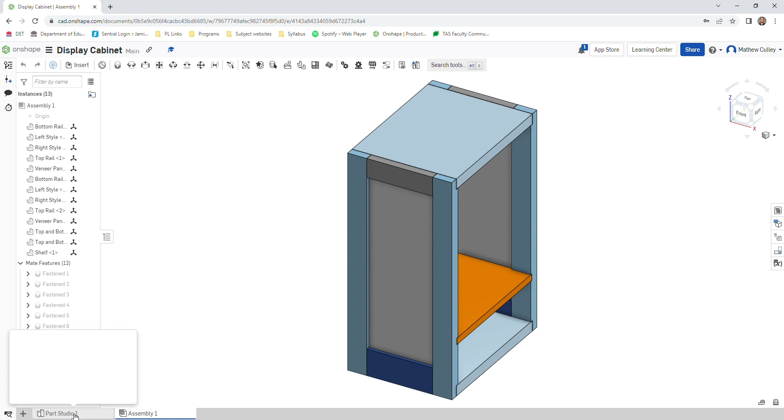The next component we're going to draw and construct is the drawer for our display cabinet. So we're going to go back into our part studio here down the bottom. Left click, double click on front on my cube here. Okay, and we're going to begin a new sketch.

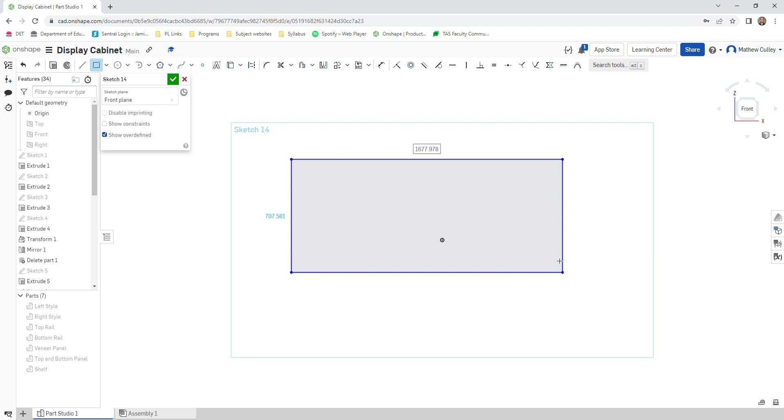Now we'll start with the drawer front. I need to select my sketch plane front. I'm going to start out with a corner rectangle, G, that is 228 millimeters by 72 millimeters. Press escape, and just delete those dimensions to tidy it up.

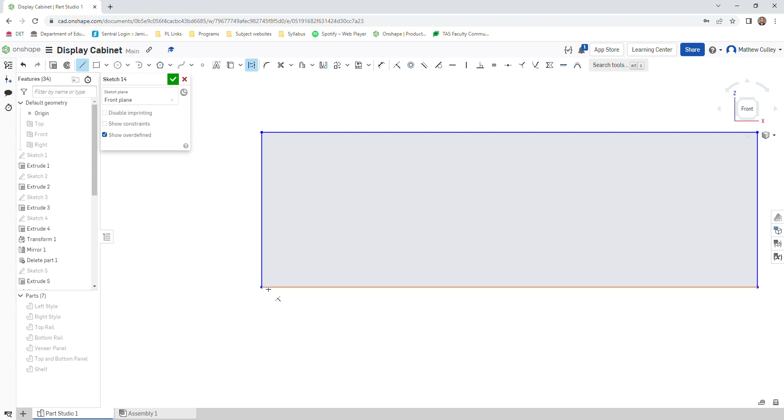L for line, Q for construction. Just going to click on this bottom corner here. We're going to come across 12 millimeters. Enter. Escape. And I'll do the same thing from the other side.

So L for line, Q for construction. Left click. Drag across 12. Enter. Now from that point you can go straight up to the top, left click, and enter.

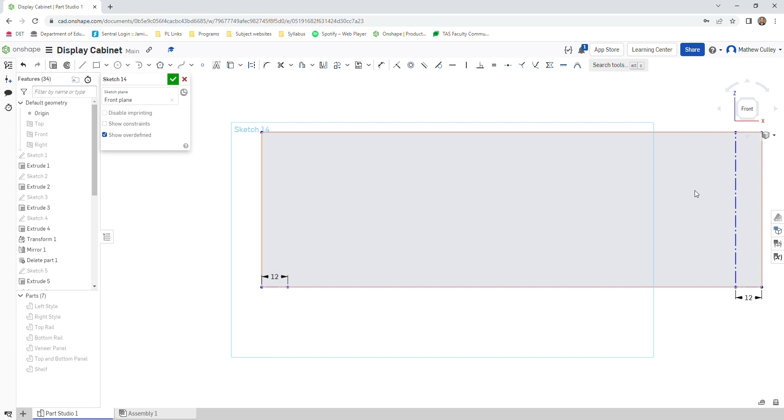Escape. Now if ever you want to get any of your dimensions back, say for this line here or that line there, all you need to do is go up to our dimension tool, left click once, click on our line, drag down. Now you can see that by putting in those construction lines, it has changed my overall dimension, my original size, which was 228. So I'm just going to change that back. Okay, and it pulls it back into the size that it needs to be.

Press escape. Okay, I'm going to go line and Q for construction again. Start at this bottom corner, come up 8 millimeters, enter. And I'll do the same thing over here. Now I can either come back over and restart it from the bottom, or I can just bring my construction line right across. You can see how it's gone yellow, and I snap it in on the side here, left click and escape. I now have my construction line set to begin drawing my finger joints for the front of the drawer.

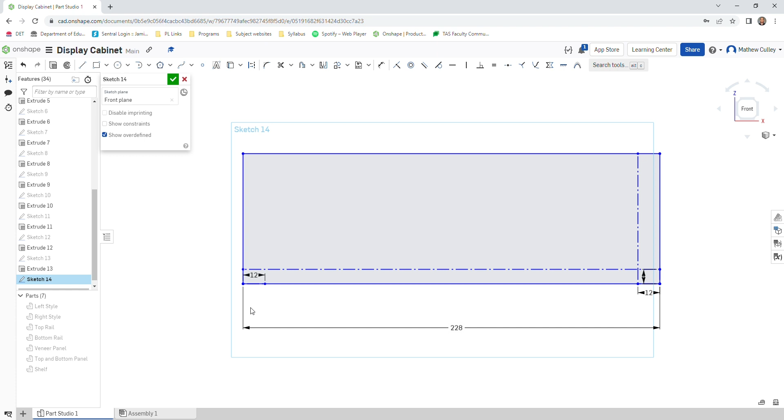I'm just going to put in one more construction line. L, Q, come up to the top, making sure that it is 90 degrees. Done. Okay, this next part is a little bit tricky, but follow along so we can make sure that your finger joints are all evenly spaced apart.

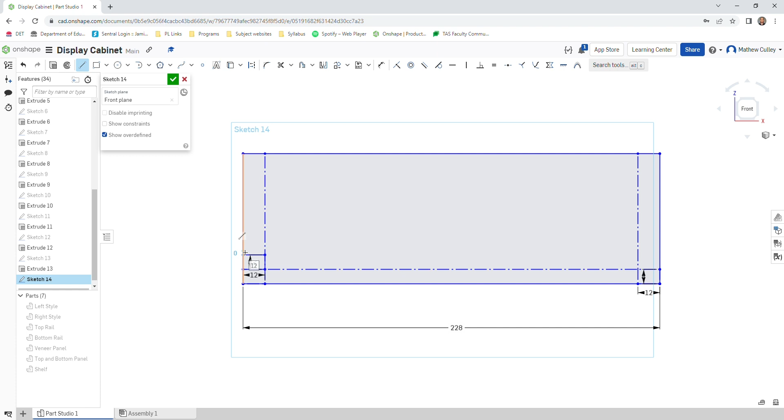So we're going to start with L for line. Just going to start on this construction point, left click once, come across to where it intersects that construction line, left click, that should be 12 millimeters, that's fine. Going to come up, left click once, make that one 8, hit enter. Now come back across to the side here. We're going to continue that process and snake our way all the way up the side here. So 8, enter, then come up, 8, enter.

Making sure that all my lines are perpendicular at 90 degrees. That is my last one, so escape.

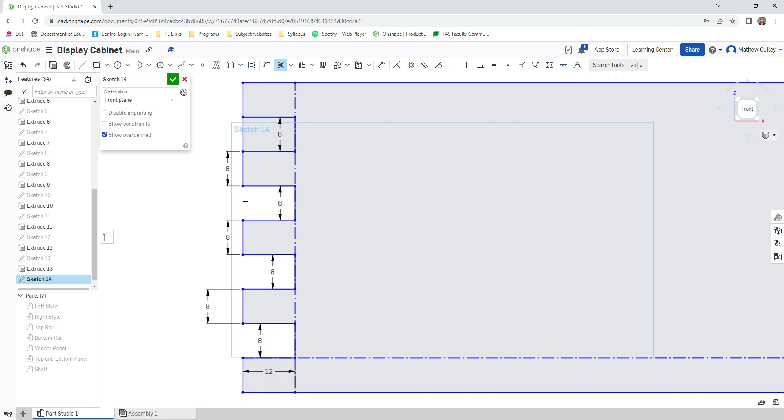Okay, you're now going to grab your trim tool. So we can come along up the top here to our scissors, or we can press M for our shortcut. We're going to start trimming some of these lines that we don't need here. So we're going to remove that one there, there, and there. And you can see we're starting to make our finger joint.

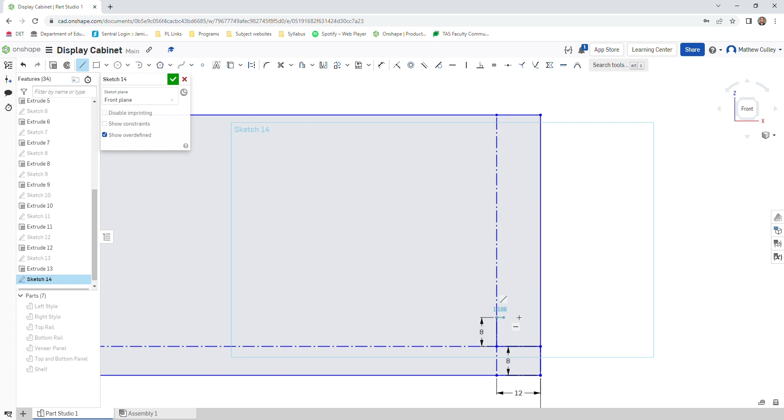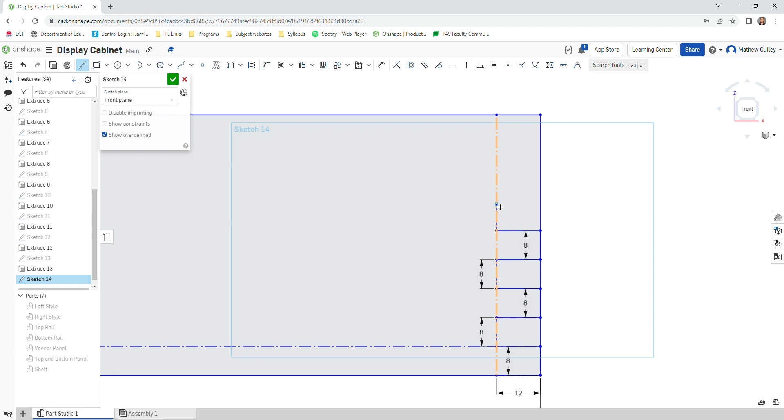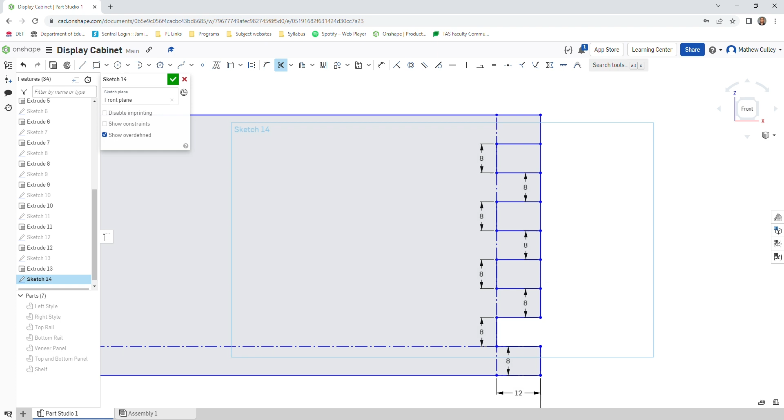We're going to repeat this process on this side here to complete the other side. Left click, 12, up 8, and continue that all the way up, snaking your way to the top. And escape. M for trim. Start with the second line and delete every second section. And we now have our fingers on either end.

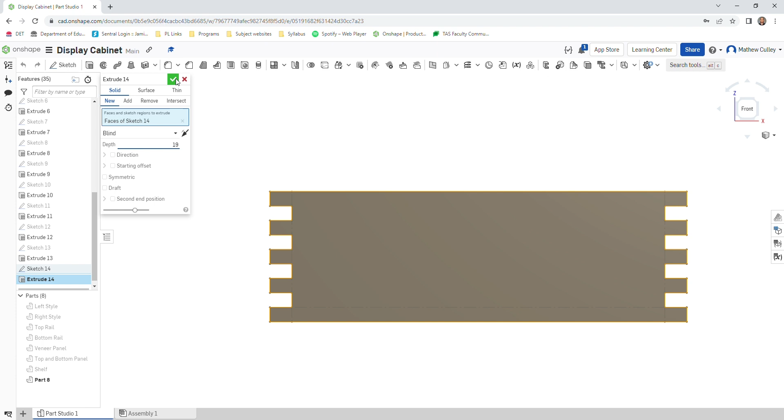I'm now going to go to my extrude tool. Okay, and we're going to extrude that 19 millimeters. Okay, that is now our drawer front with our finger joints.

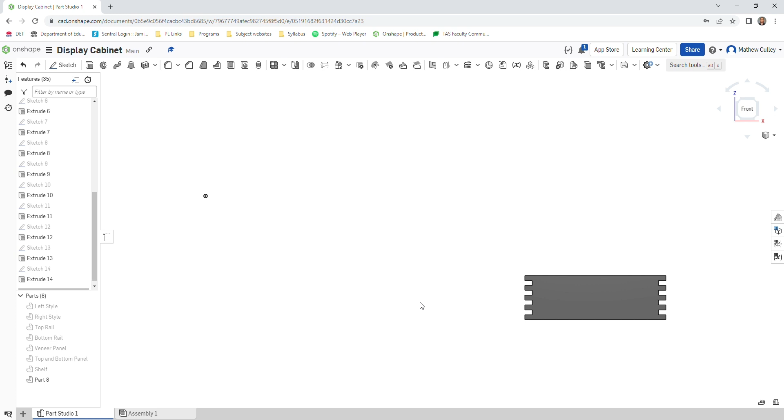There's one more step that we need to do, and that is to put a housing along the bottom here for the bottom of our drawer to sit in. So I'll square that back up. I'm going to create a new sketch. Select the face, L for line, Q for construction.

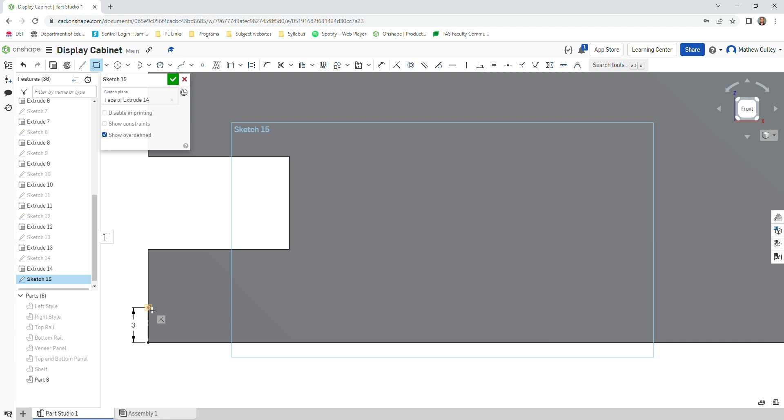Start in the bottom corner here, zoom right in. I only want to come up 3 millimeters. Enter. Okay, escape. G for my corner rectangle. Left click once. Zoom out. And I'm going to come right across to this side here, making sure that that edge is now yellow. Left click again. Okay, if I zoom out, you can see here it's waiting for me to enter the dimensions. So 228, enter, and 3, enter.

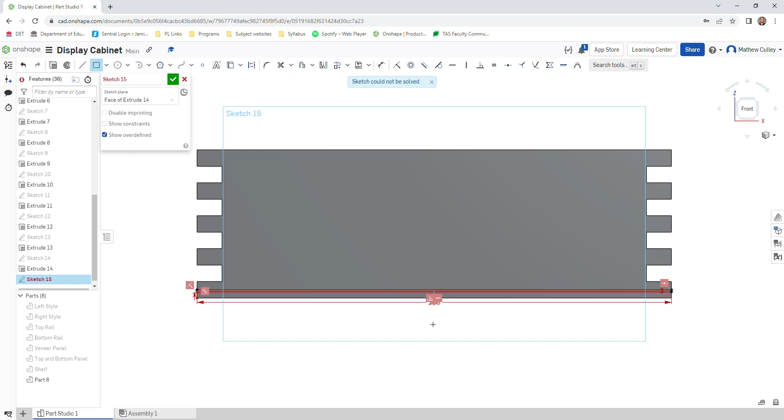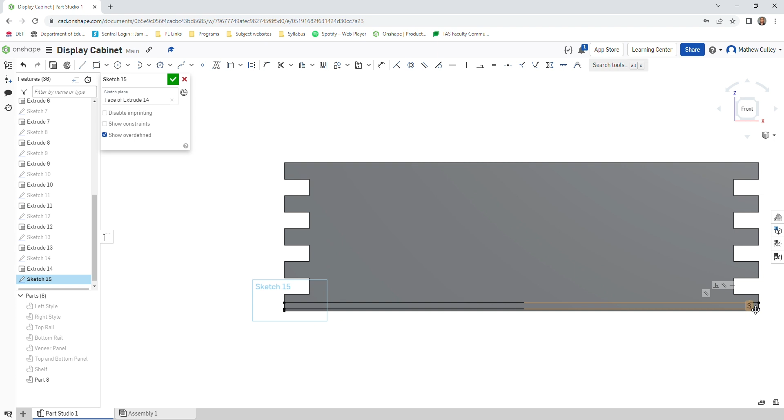Now you can see that it has gone red again. Okay, it's just those conflicting dimensions. So press escape, zoom in on that dimension there, left click once, delete, zoom out, zoom in over here, left click on our construction line, dimension, delete. Okay, and you can see it's now changed our housing. Okay, it's made it bigger. We don't want that, but you can see over here we have another dimension.

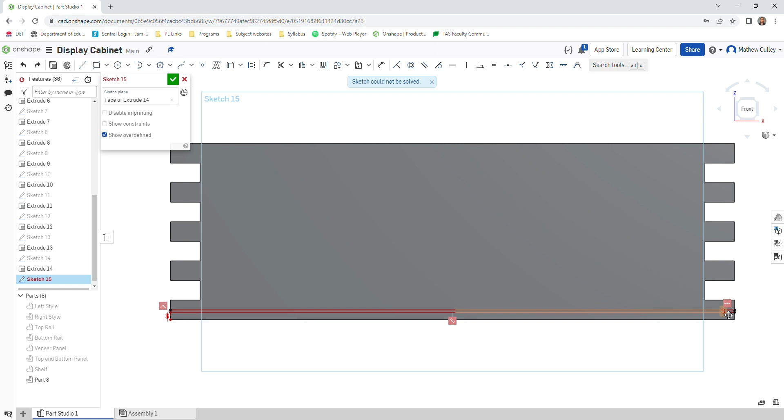Now that's not 3 millimeters. Okay, it just doesn't look right. So if I zoom back out, Control Z, or press back up here to undo our last move. Okay, I'm going to zoom in on this dimension here. Left click, just delete that one. Now you can see my housing hasn't moved.

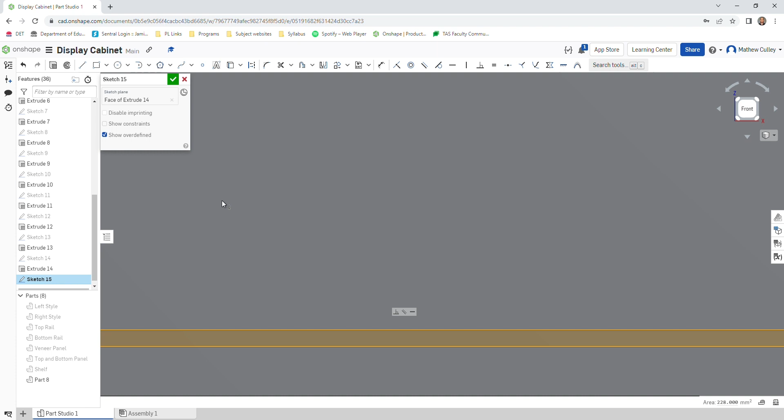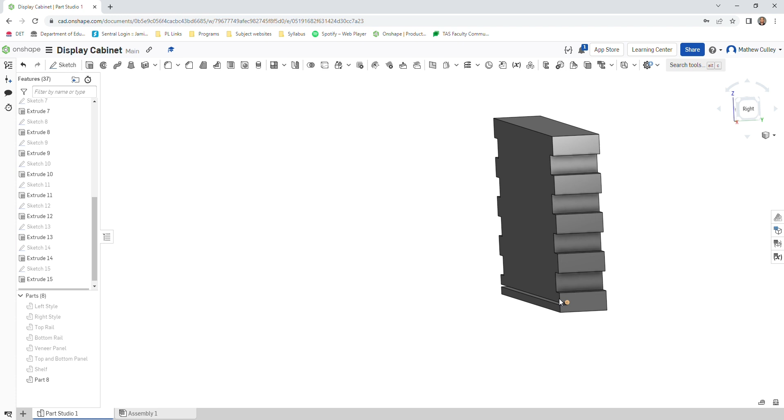Okay, it's solved my sketch. I have no more issues. I can now zoom in on my rectangle here. I'm going to click in between, so I've selected the shape. I'm going to extrude. We are now removing because we're doing a housing. We're going to change that to 3 millimeters and click our green tick. And we now have our housing for our drawer base.

Come over here, right click, rename, drawer.